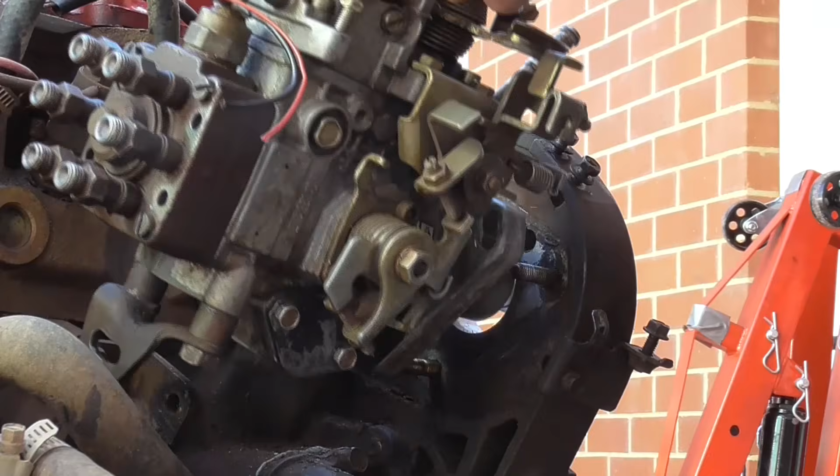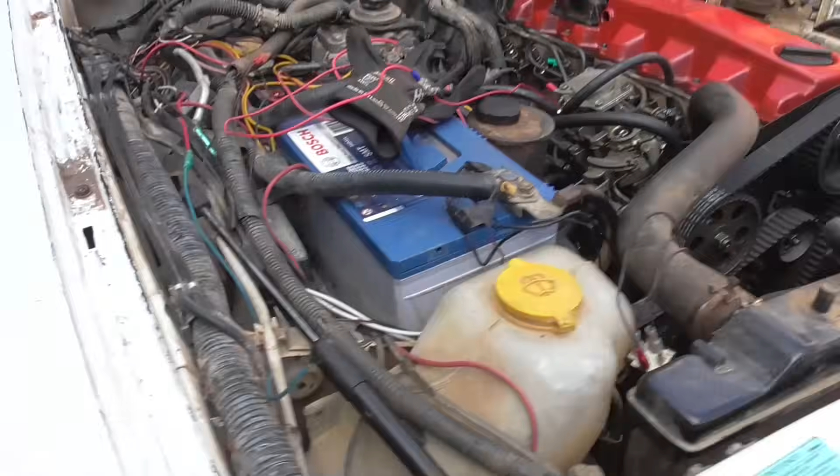But enough about me. We'll get into the nitty gritty of this video and the reason why everyone's here. So the reason everyone's here is you guys want to learn how to tune your Bosch mechanical injection pump, the VE style type, with the boost compensator bolted to the top. Before we talk about the pump in detail though, I just want to talk about how diesel engines differ from petrol engines, just because there's some important information you should probably know before you start tuning yours.

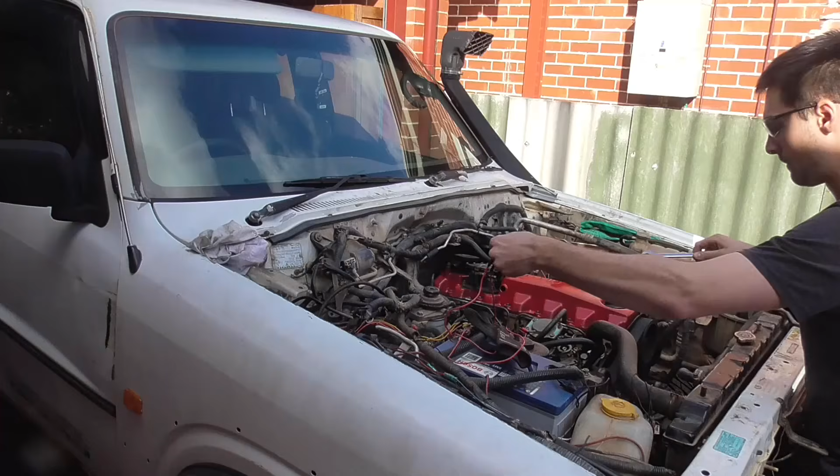So diesel engines, unlike petrol engines, do not trigger their combustion event with a spark. What they do is they will crack open an injector right as the piston's coming to top dead center, spray in an atomized spray of diesel fuel, and the high compression ratio of the engine will have heated the air up to a point where the atomized spray will self-combust as soon as it's sprayed into this extremely heated environment. So because of this, diesel engines tend to have much hotter exhaust temperatures. This is also due to the fact that they rev lower and they flow less air to draw heat out of all of the components of the engine.

The thing about diesel engines, which makes them much more simple to tune and operate in comparison to a petrol equivalent, is the fact that all you have to do is modulate the amount of fuel going into the motor. A petrol engine has to modulate both the amount of air with the throttle body, as well as the amount of fuel, and then as well as the spark event and its dynamic timing relating to the revs and the throttle position and the boost and so forth. Diesel engines though, older ones at least, don't have throttle bodies. All they do is push air into the engine, allowing that to get compressed and heated up, and then the amount of fuel is what's going to modulate how much power you're actually making.

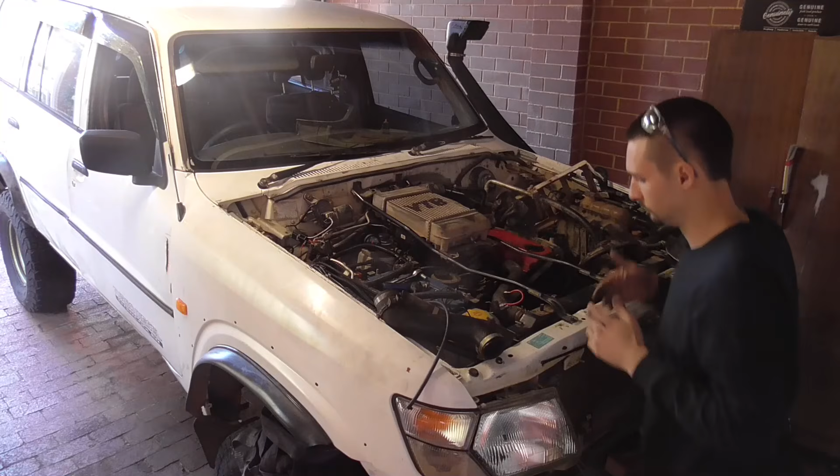So if you're like me, and you've got an RD28 and it's in a GU, so you've swapped from the electric injection pump to the mechanical injection pump, the first thing you need to do is get the car running, and the way you do that is you time the VE pump up in relation to the engine. So the pump sits on cammed out holes, allowing you to rotate its position in comparison to the engine, and what this does is it'll advance or retard the timing to the point where the advance built into the pump will match how it'll go through the rev range and the engine will operate smoothly and efficiently.

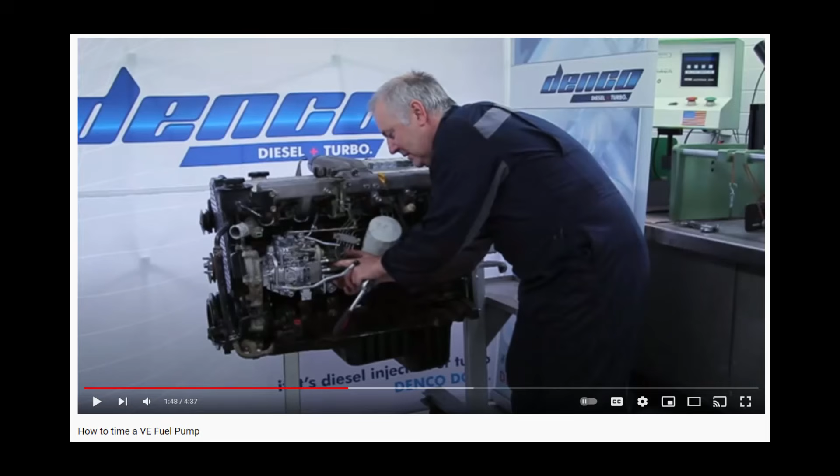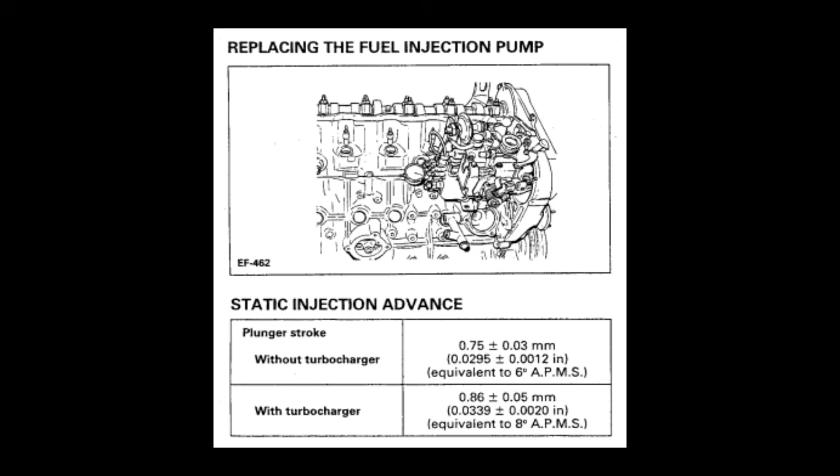So the way you do that, the proper way according to the service manual, is you bolt a dial indicator down the inside of the pump, inside of the hydro head. This will sit on the front of the plunger. You will then rotate the engine to a certain position. I believe it's number 1, bottom dead center. And there should be a reading on the plunger which will change as you advance and retard the pump. This isn't the only method, however.

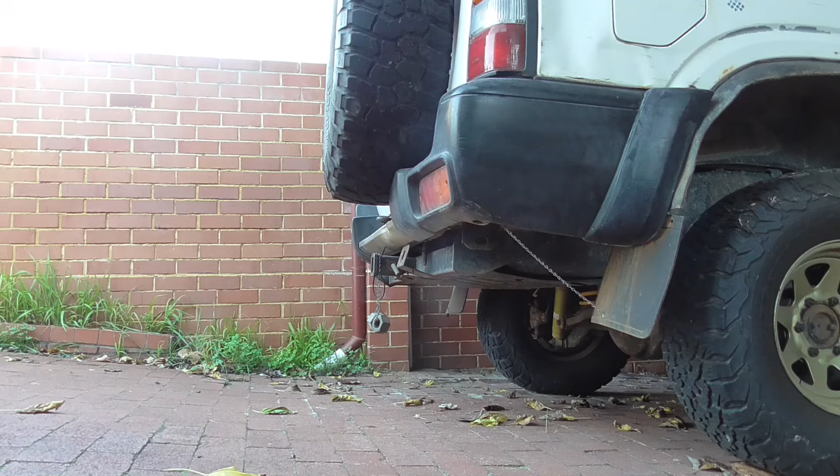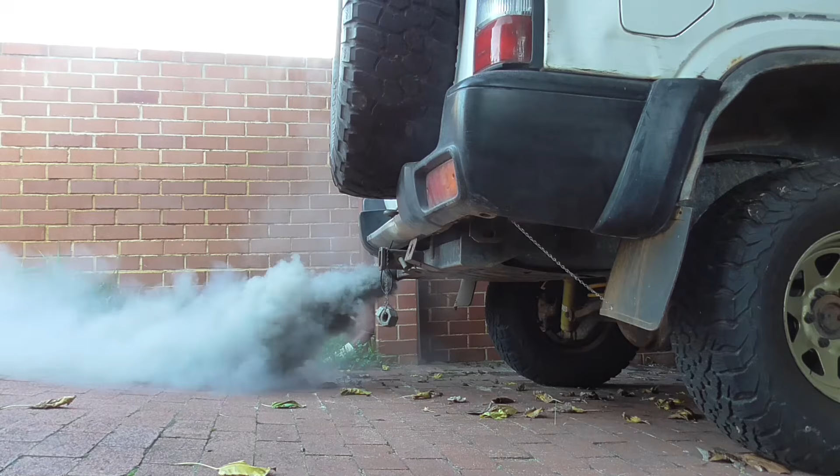If you want to do the slightly rougher caveman approach, you can simply bolt your pump on, set it to a certain position, try and start the motor. If it doesn't start, that means the pump is too retarded, and if it starts and sounds really clackety, it means it's too advanced. So all you've got to do is just start it a few times, listen for it, loosen the nuts off a little bit, not all the way, otherwise bad things might happen, and then just knock the pump back and forward with a soft blow hammer, advancing and retarding it until you can hear the knockety clickety go away and it's still relatively easy to start. But once you've timed up everything to ear, it should sound pretty good and you should have the setting pretty close to what the factory setting with the dial indicator should be.

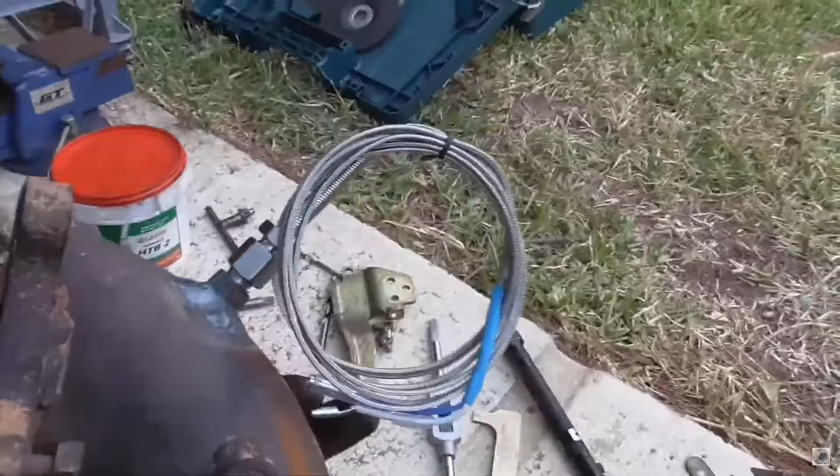Alright, so the biggest thing you're going to need to tune your engine up is an exhaust gas temperature gauge. So what this gauge will allow you to do is visibly see the temperature of the gases flowing through the exhaust. And this will give you an indication of how hot the combustion temperatures are, as well as giving you a sort of safety margin so that if you go over a certain temperature, i.e.

650, 700 degrees, you know to let off because you're going to start doing pretty severe damage to your engine after that. So with a diesel, when you add more fuel to the combustion event, you will in turn create more black soot or black smoke, and this will increase the combustion temperatures. So this is what you have to keep in mind, because if you run a diesel too hot, or if you run a diesel with too much fuel, you might make 2% more power, but you're going to do excessive damage to the engine, and yeah, that's never fun for anyone.

So here are some videos that the last owner sent me, and you can see all of the soot coming out of the exhaust. This is pretty excessive. I would personally say you do not need to run like this. If you want to be a cowboy, that's up to you. I'm not fussed, but yeah, you're hearing this from me now. This is not what you want to be running out your exhaust.

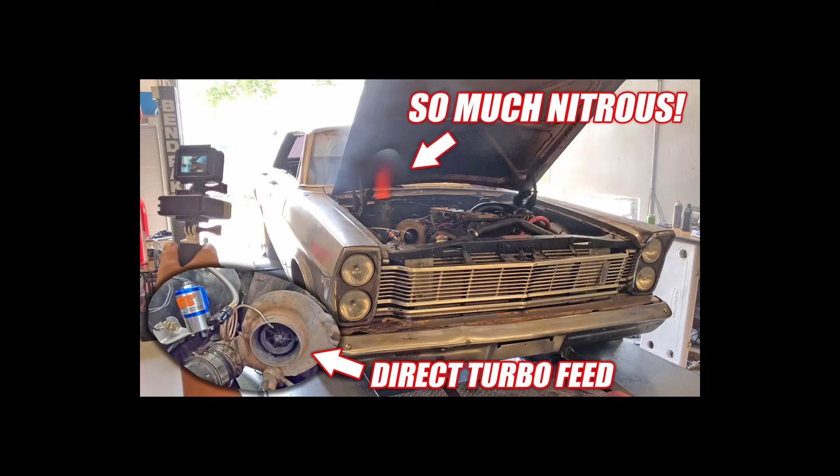Alright, so there's a video that I'd like you all to watch. It's the Cleetus McFarland video where they put their 12-valve Cummins-powered Galaxie on the dyno. In this video, it gives a good indication of what we're trying to achieve or what we're looking for whilst we're tuning our engines. So with this car, when they start the pull, you'll see instantly there's black smoke coming out of the exhaust. So this is excessive fueling going into the engine and unburnt or partially burnt diesel getting shot into the exhaust and making nasty smoke.

But then as they get up past that into full boost, you'll notice that the smoke thins out into grey, almost see-through smoke. So why this has happened is because as the turbo's spooled up, there's a lot more air to match that oversaturation of fuel, making a leaner mixture and then making less smoke coming out the exhaust. So what we're trying to achieve in full boost is just a bit of grey sort of see-through smoke coming out of the exhaust.

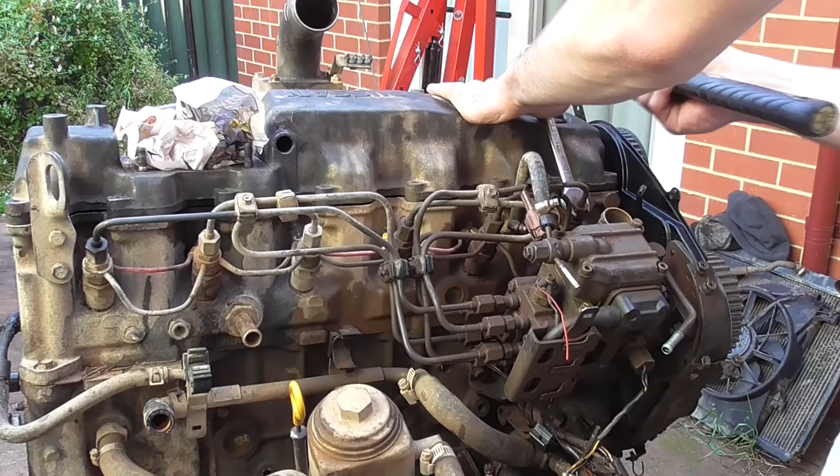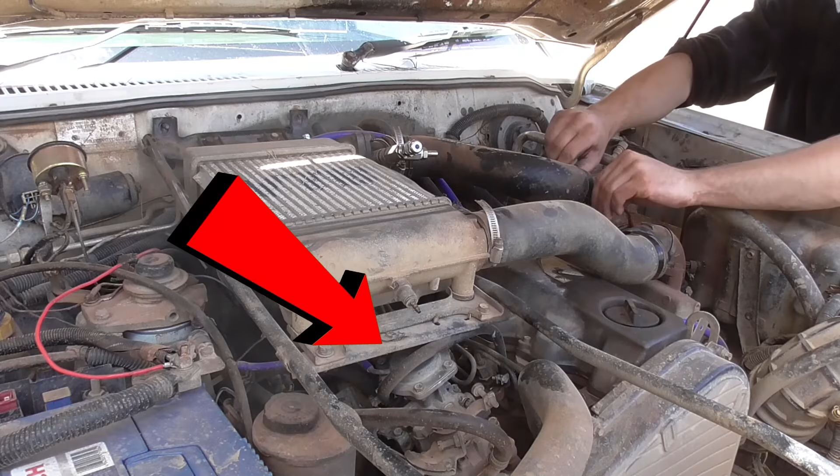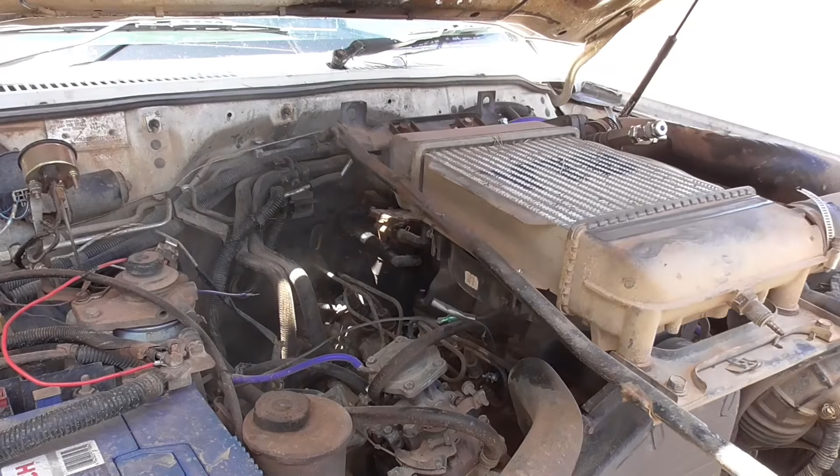Okay, so I'd assume that most of the people watching this video, here for the RD28 at least, will have done the swap from the electronic ETI pump to the mechanical GQ pump with the boost compensator on top. So once you've done the swap with your GU Patrol, rather annoyingly you'll notice that access to the top of the pump's almost completely obstructed by the top mount intercooler. You can still take the top of the boost compensator off and make adjustments, however you can't pull the fuel pin and diaphragm out completely, so it's better to take the top mount off.

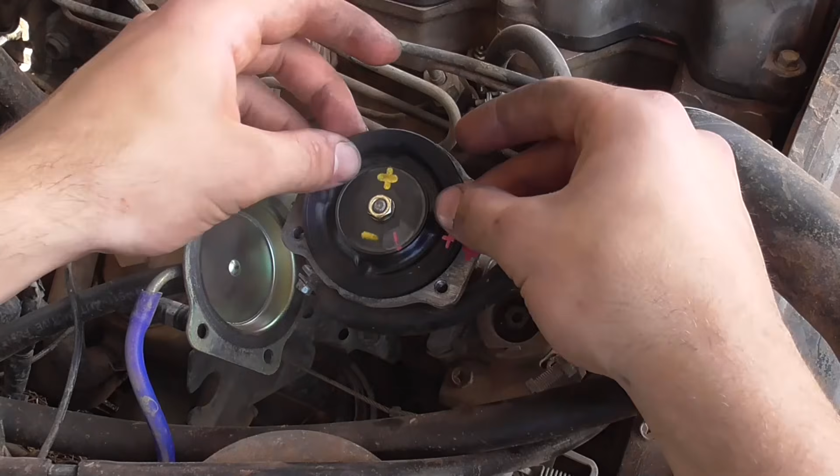So there's spring tension held by the cap under here, so I suggest taking 2 corner bolts out completely and then slowly loosening the other 2 corner bolts off evenly, and this will mean that the top cap comes up and doesn't pinch on one side and damage your diaphragm. So as soon as the top cap comes off, first thing you want to do is mark where the diaphragm is. See where it is marked there, pointing forward to the radiator.

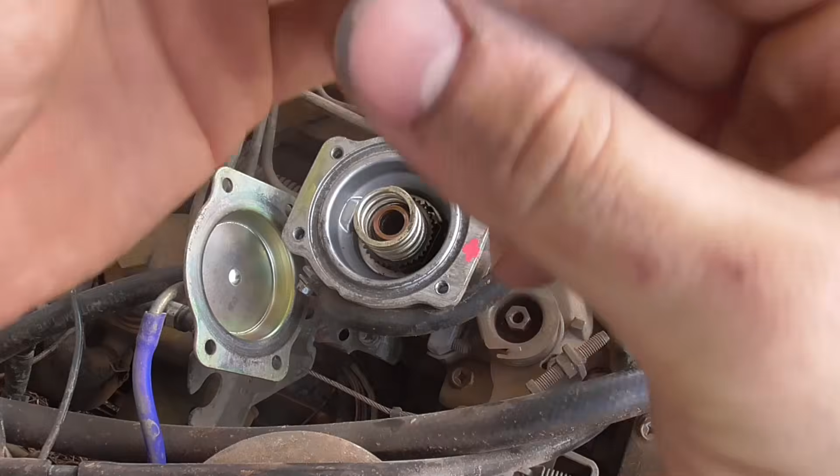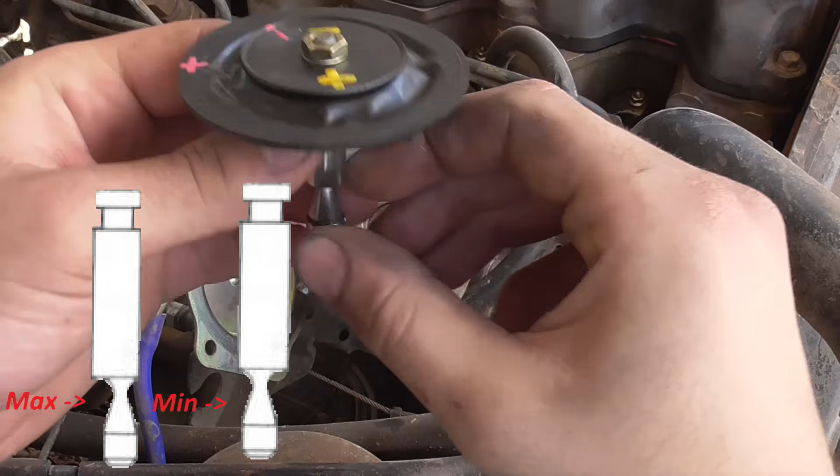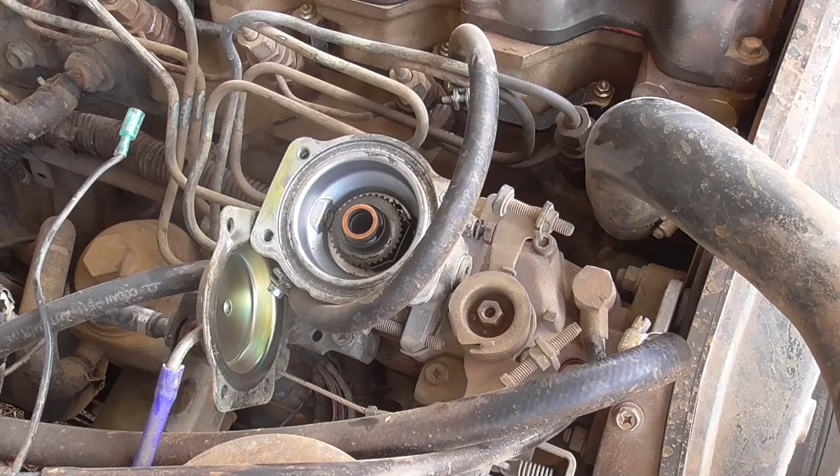You can pull it up and you'll see it's connected to this boost pin here with the ground cam profile in it. And what you need to notice about this is it's ground eccentrically in relation to the diameter of the pin. So you see how it moves around left to right? So what you should go ahead and do is, as I've done with the yellow texta on top, mark the minimum and maximum cam profile gradient in it. Next we got the spring, nothing too special. Then you got the copper shim, and the boost ring or the star wheel, whatever you want to call it. So I'll put together an animation to help everyone understand how all these components work together.

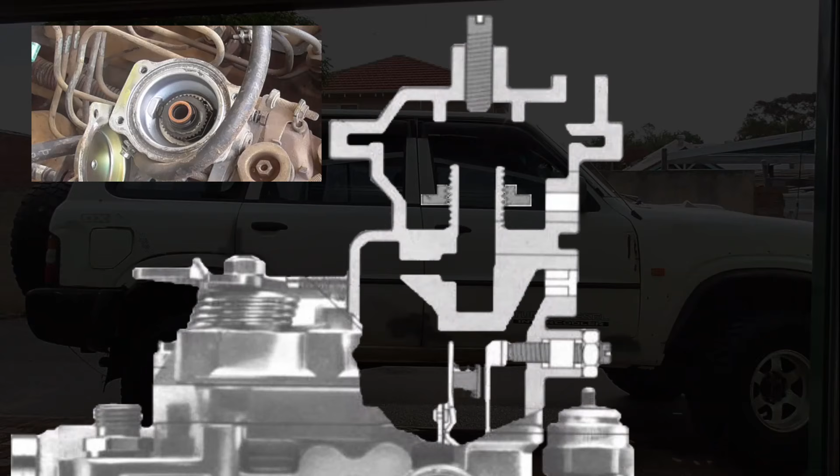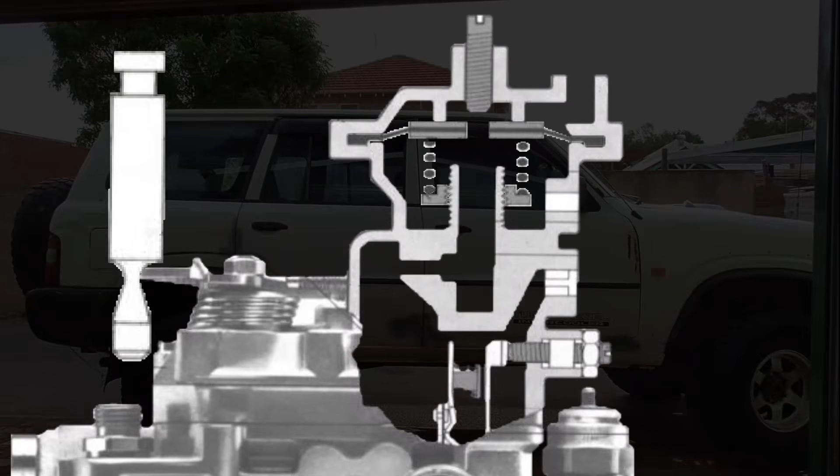So the first component that you've got, if you were assembling this assembly all together, is the boost ring. So this boost ring has a thread cut on the inside of it, and what this thread will do is it'll wind down to the inside of the boost compensator, and this thread means that you can position it up or down on the thread. This will allow you to add or remove tension on the spring that sits on top of it. Then next goes in the spring. Then we've got the diaphragm. Then you've got the fuel pin, which is fastened to the diaphragm via a bolt. I haven't included the copper shim in this, we'll talk about that later on.

So when you're driving around, you'll make boost pressure. There is a boost manifold reference to the top of the pump, and what will happen once you make boost pressure, you'll pressurize the top part of the pump, which is separated by the diaphragm. This will then press down, overcoming the spring tension, moving the whole position of the fuel pin downwards.

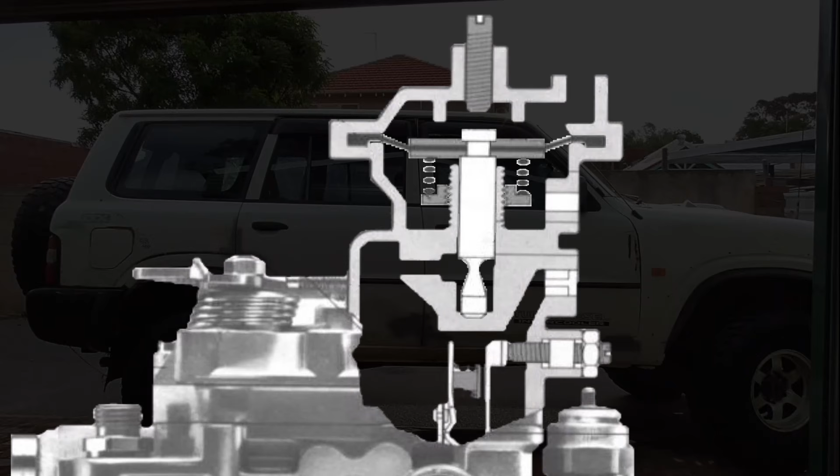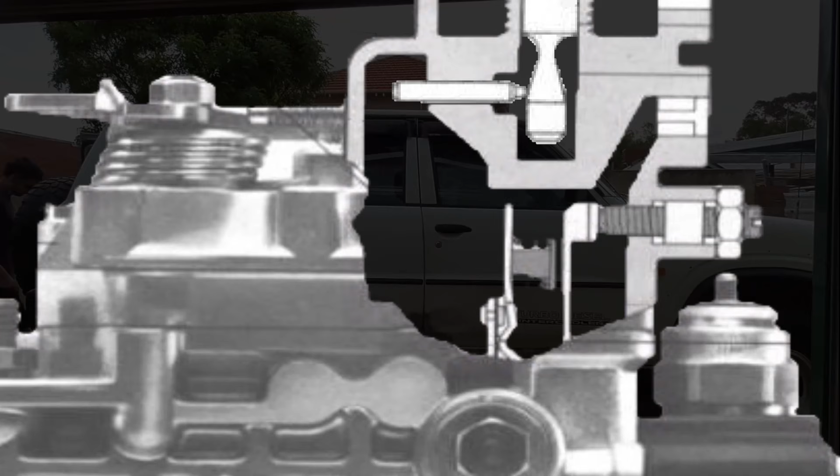Alright, now that we understand this, we'll see what goes on inside the pump. So what we know about the fuel pin is that once it gets energized, it'll be pushed down. So the next component is what I call the conveyor pin. The conveyor pin is the slave component to the fuel pin. It sits on a drilled port that separates the inside of the boost compensator to the inside of the pump, which is submerged in diesel.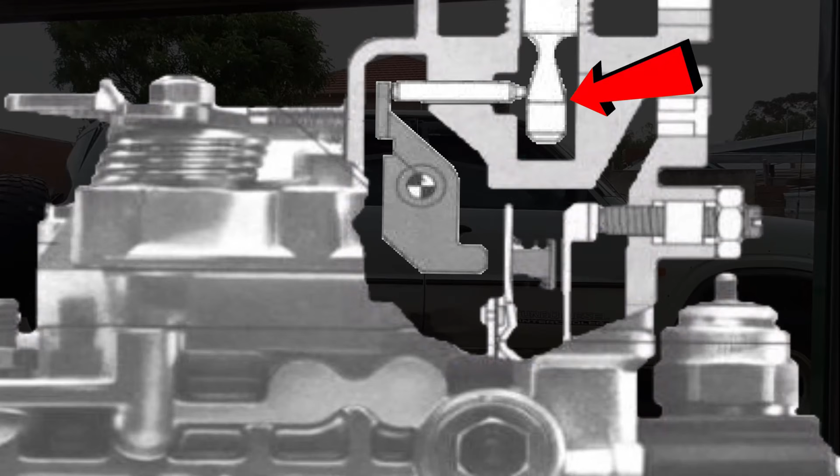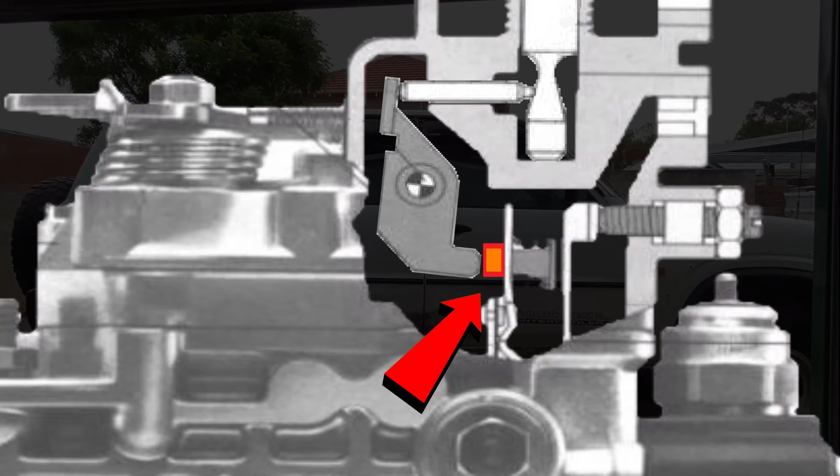And then the last component we got for fuel compensation is the reverse lever. So what this does is it limits the maximum travel of the throttle lever assembly inside the pump. Once boost is made, you'll see that the fuel pin will move down. This will allow the conveyor pin to move in and then hence allow the reverse lever to pivot, which will open up the gap of the maximum travel of the throttle lever, hence allowing more fuel into the motor to match the added boost or the added air from the turbo.

So now that we understand that, we're going to go for a drive and see how the engine is currently running without any changes made to the pump. So I'll go for a bit of a drive, I'll let this video play, and then after it's done, we'll watch it again and I'll talk over it and talk you through what's happening on the screen.

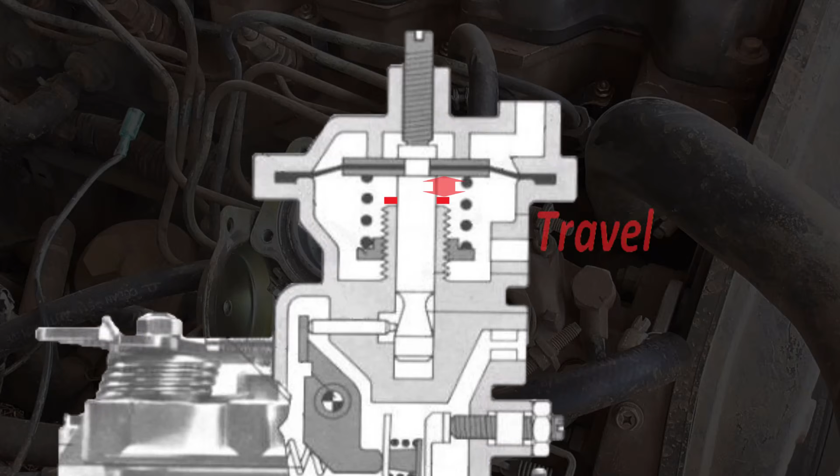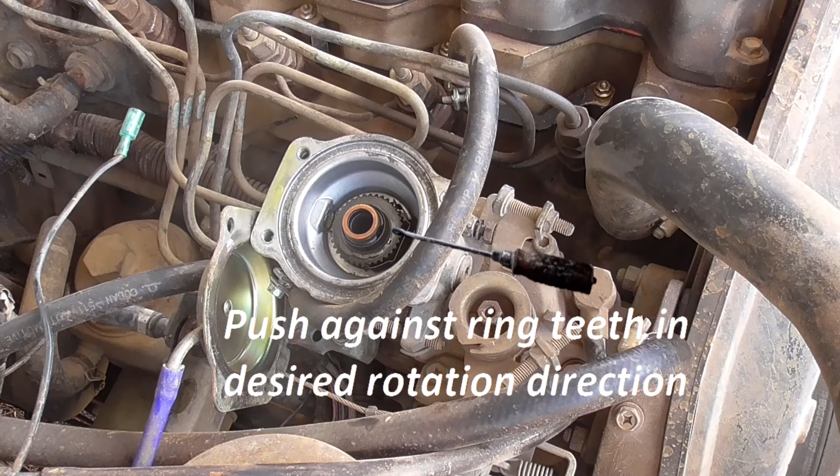So what I've done is I've removed the copper washer from my pump. What this is going to mean is that the boost pin is able to come down more, meaning the conveyor pin can come in more, and the maximum amount of fuel allowed in by the injector pump is more so. So I'm hoping this will mean that once I get into full boost, there'll be a bit more smoke or a bit more power right up the top, but I may have to make a few more changes to the spring tension.

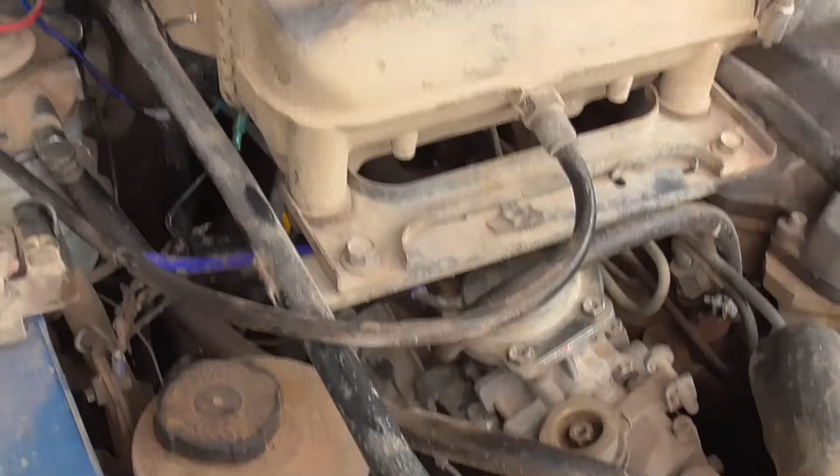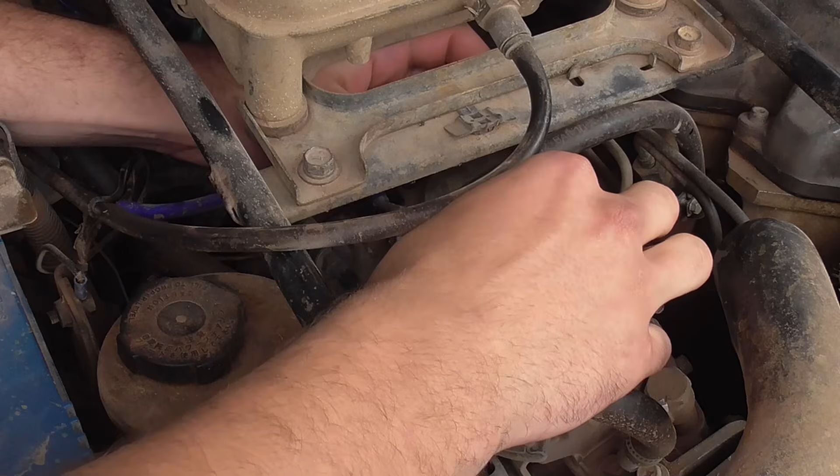So as you can see with the exhaust smoke, it has changed a little bit with the removal of the shim. This is still, however, not perfect. What I believe is happening is that the boost ring is too far down. What this means is that the boost pin is pushed down to its maximum travel by around 10 psi, and then anything over this boost level will see no more fuel gain because there's no more stroke left for the fuel pin to go down. So how do we fix this? Well, first let me animate what's happening for everybody to understand.

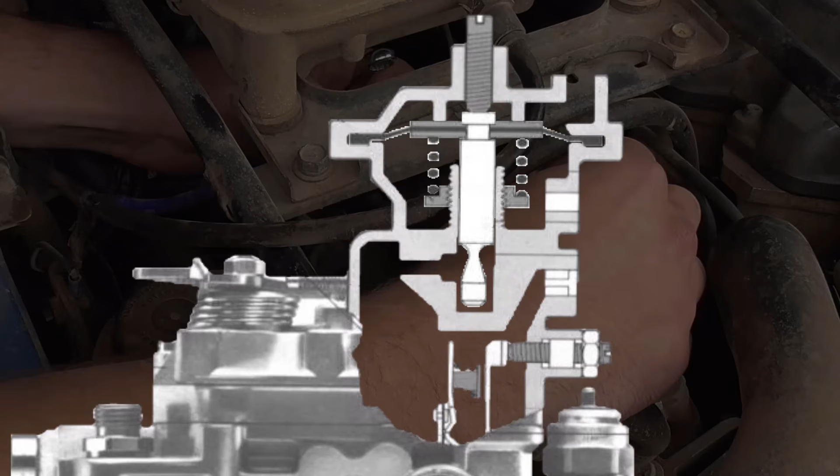So right now the boost ring is down here. This means the spring is easily compressed at the start, hence why all the fuel is going in up to 10 psi of boost. So what I'm going to do is wind the ring back up to preload the spring more. This will mean that the spring is harder to compress by boost pressure, slowing down the amount of gain that the fuel is going to get relative to boost being made. As well as this, I'm going to rotate the fuel pin around a tiny bit. This will increase no boost fuel delivery and full boost fuel delivery.

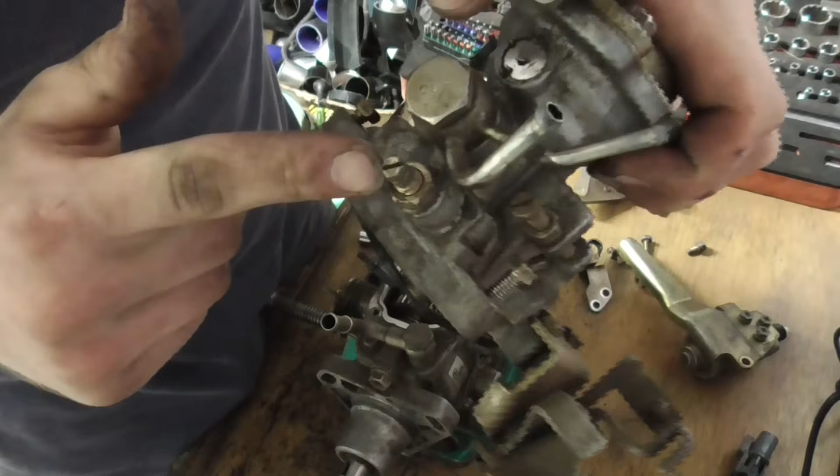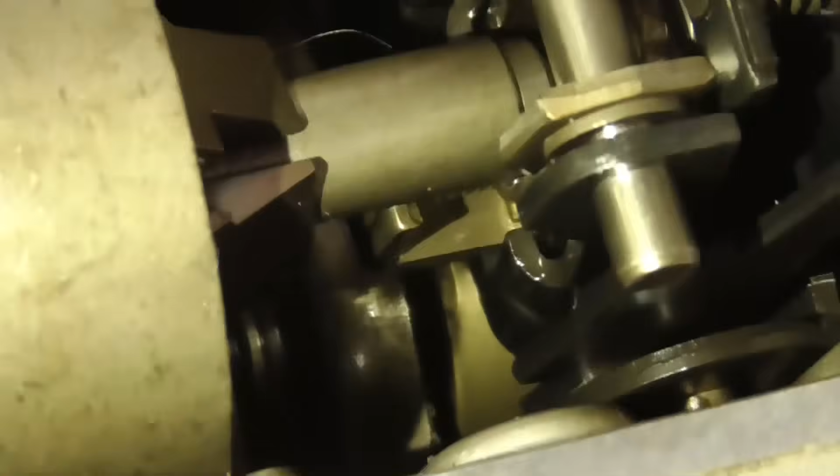So, I'm finally going to address the elephant in the room, the fuel screw. The reason I haven't addressed this yet is because I believe that it's more important to understand how the boost compensator works before you start fooling around with the fuel screw, because I myself made the mistake of assuming the fuel screw was all you needed to fool with the pump.

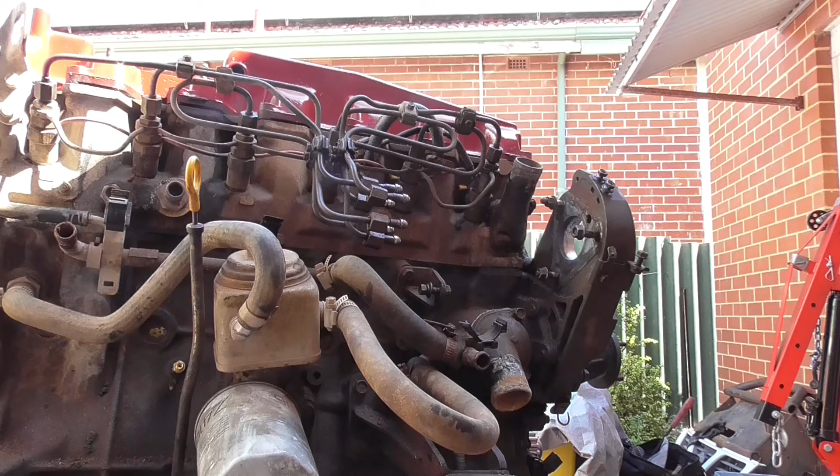So the reason I say that is because when I initially got the engine running, the boost compensator was set to the very first pull I'd done, and what you see in that is that there's fuel when you cross over into boost and get up to about 10 psi, but as soon as you get up above that, there's no fuel and the car just runs lean. Now, when I'd actually first got it running, I didn't even have smoke coming out when it crossed over into boost. There was barely any.

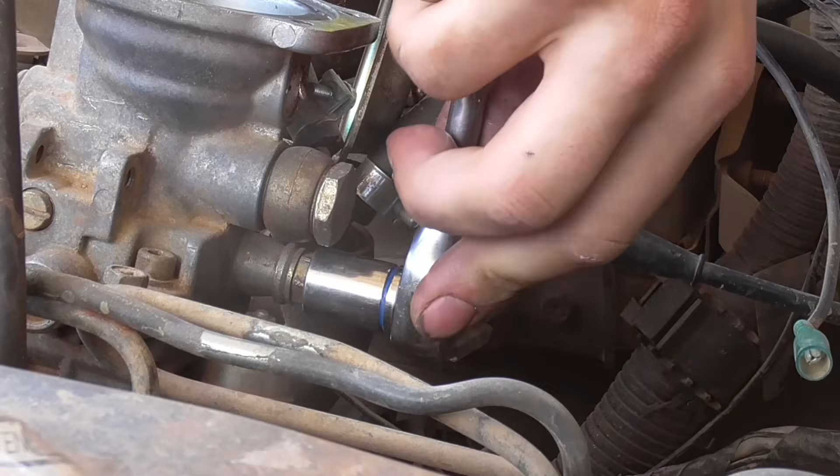And what that meant was that I had no visible indication that there was no fuel up top. And this meant that I was losing potential power I could have been making in full boost without knowing it, because there was no visible smoke for me to gauge that. So because of that, I'm going to tell you to wind your fuel screw up to give you that visible indication of how the engine's running, which is what I've been basing my tune off.

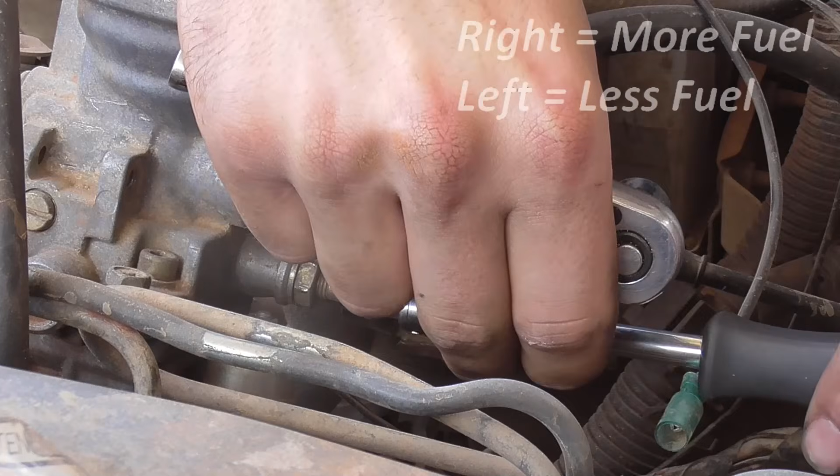Once this is all done and it looks pretty even, what you can go ahead and do is wind the fuel screw back out. A rule of thumb with the fuel screw is about 1/8 of a turn for each change, marking it each time with a paint marker or a scribe, up to you. And the reason you do that is so you can revert to the original position if the changes you made were undesirable.

So I'm going to address again the smoke. With diesel smoke, if you're putting soot out the exhaust, you're probably making an extra 3% power than if you were putting out a tiny little bit of a grey puff here and there. The only diesel engines that need to be making all the black soot are trucks or engines being pushed to their absolute limit. So diesel drag trucks, as well as big industrial trucks.

The older generations of trucks are the ones that you'll see making all that soot, whereas modern ones have such high-end equipment for emissions control, such as DPFs and diesel exhaust fluid injection, that you'll see nearly no particulate getting emitted from the exhausts. So in saying that, I'm going to leave it up to everyone's own discretion as to how much soot you want coming out of your exhaust.

I'll leave the disclaimer here that any damage you do to your engine is not on my accountability. I've told you that it's bad to be making soot out the exhaust, and if you do, and your turbo decides to weld itself to the compressor cover, you can't get in the comments and say, "Oh, you told me to do that and you broke my engine," because I will murder your family.